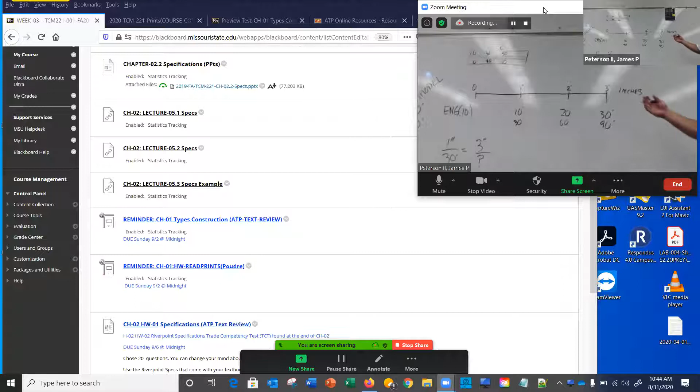Now that's physically, graphically, spatially. I've had many people that just sort of get the ratio right away because that's all it is, right? 1 inch to 30 feet is the same as a 3 inch line we measured to question mark. So here's cross multiplication: cross multiply to solve for that. We got question mark equals 3 inches times 30, so that's 90 divided by 1, which is 90. So there's 2 ways to do it, or you can use one to check the other.

I know somebody's got a question, because if not, it's the first time I've ever done an awesome job. I don't feel like that was awesome. Might be okay. It's all right. We're gonna do, you'll have the homework where we're laying out a box. I'll bring it up here in a minute. Let's see. Yep, that works.

Now, the architect scale, actually for me, is a bit of a struggle because I never use it, maybe twice a year. Which is why I didn't bring my architect scale, and I will probably mess it up the first time.

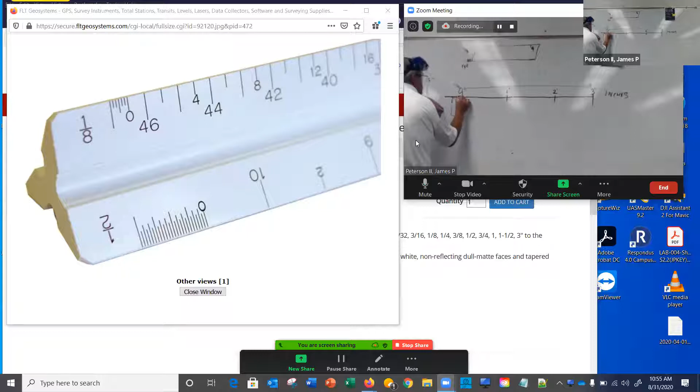You might have to guesstimate if it's between that and the 1. So if that line really continues to right there, it's 3 inches, since there's 8/8 in an inch, right?

So let's go get that first one. If we have 1/8 of an inch equals a foot, and we went a foot on paper -- let me say it again because I boo-booed. You got the 1/8 of an inch scale, so we go 1 inch on the paper. How many of those 1/8 are in there? 8. So that's 8 feet, right?

16 feet, 32 feet. Now, here's another reason I'm not a fan of the architect scales. I just told you that 1 inch is 8. Why is there a 42 next to it?

Because when you measure the other direction, it works for that scale. Whew. Nobody wants to laugh with me?

Now, that's the straight 3-inch portion. And I said that it's going to go 2, 4, 6 inches, or 0.5, but that totally would be to here. That was just to represent it. We got 32 feet, 6 inches, or you'll see later that's 32.5 feet. That's a dash between the feet and inches.

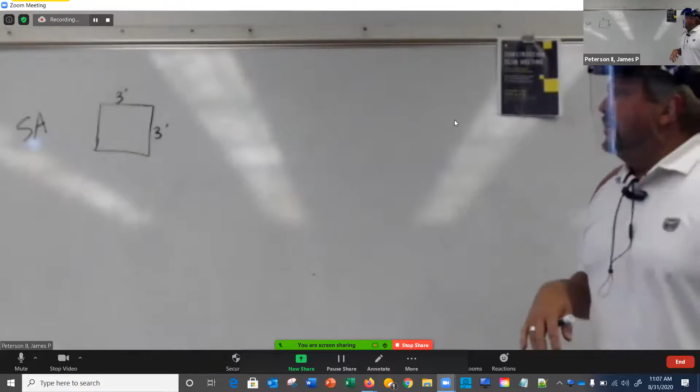We abbreviate surface area with the 2 letters in it most of the time. And if we got a little box, and that's not as square as I would like it, that's not bad. Okay, so surface area, we're just dealing with a plane view here, planar view, plan view.

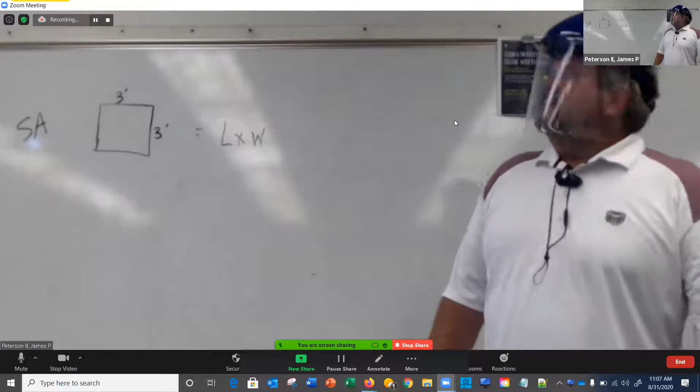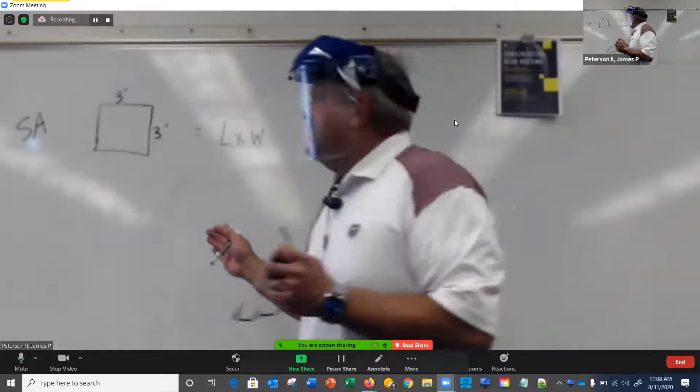And we know that it's going to be length times width, right? It doesn't always really matter which one's which. I've had some people say, which one's length, which one's width? I don't know, which way do you want to flip it? Now, in this case, it's a box, so it's just 3 times 3, 9, and that's square feet, right? Because units matter in this world. That's kind of a magic number. Actually, I picked 3 feet because what other distance is 3 feet long that you measure with, or your parents may have used? No, can't go there, they don't do that anymore. Anybody know what 3 feet equals in this world? Yeah, the yard, thank you.

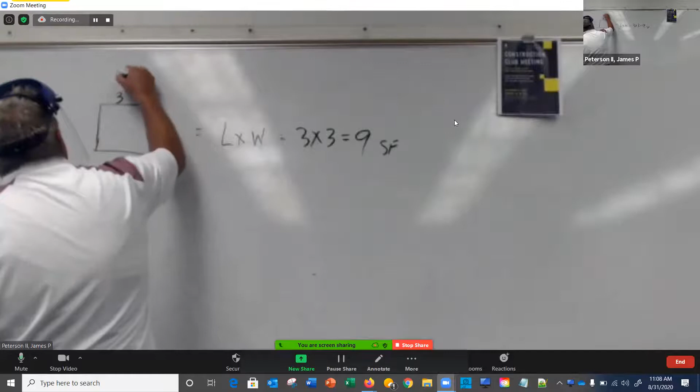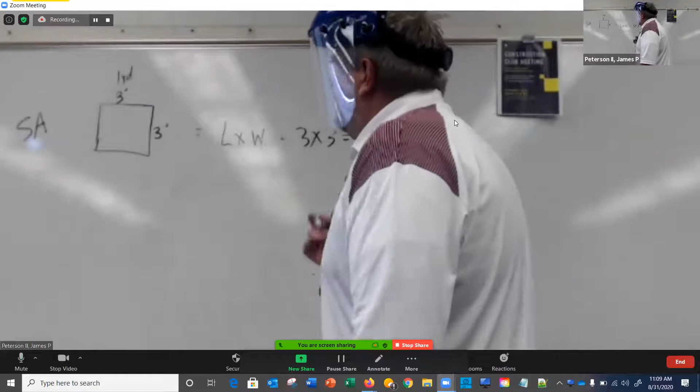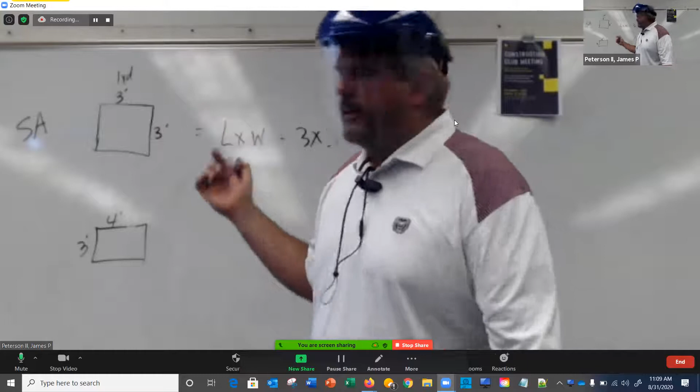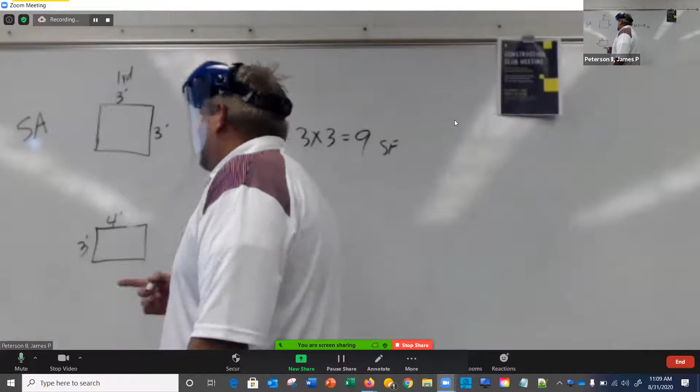I've heard 2.7, 3.2, all kinds of crazy numbers. 3.2 is getting there because that's meters. All right, so that is also 1 yard. Now, we're not going to get into metric in this class, so we can avoid that. Now, if we took that same thing, and now it's not square, no big deal, right? I don't care which one is length times width, unless we're putting this in the ground on a set of plans, it's going to tell you which way is up. Matter of fact, when I draw this in 3D here in a minute, neither one of those is... well, I'll let you make your own conclusions here in a minute.

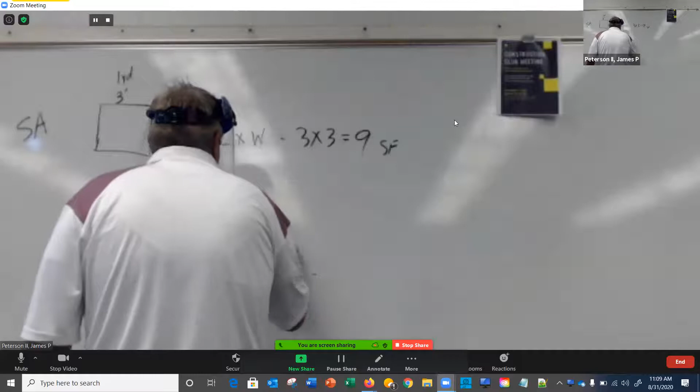So that's 12 square feet. All right, hopefully no questions there. Now let's try to go a little further.

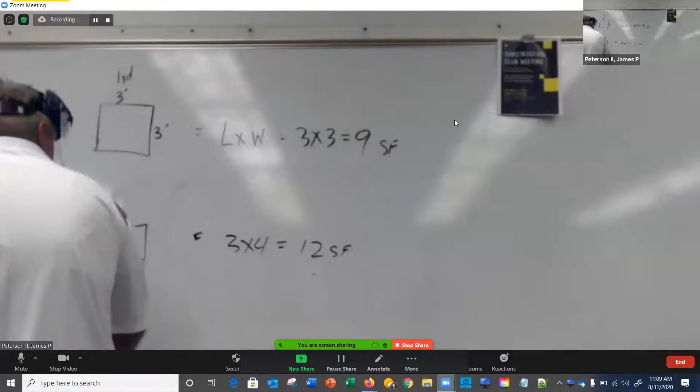Let's deal with the volume, right? Let's see how good I am today on my 3D boxes. They get a little wonky, not too bad. Forgive that it's not exactly proportional. That is a square box.

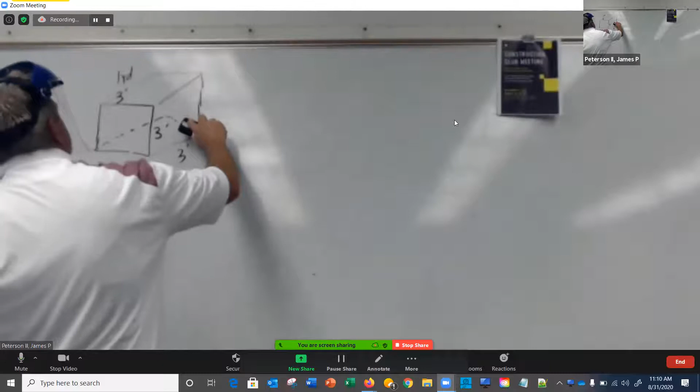So we want the volume of that. Now, if I was really good... nope, that's boo-booed, isn't it? That's not right. Yeah, it's close, a little wacky. I better skip that. I'm not too good at that hidden line. I know that would be it. I did have it right, didn't I? Yeah, I'm going to leave it though.

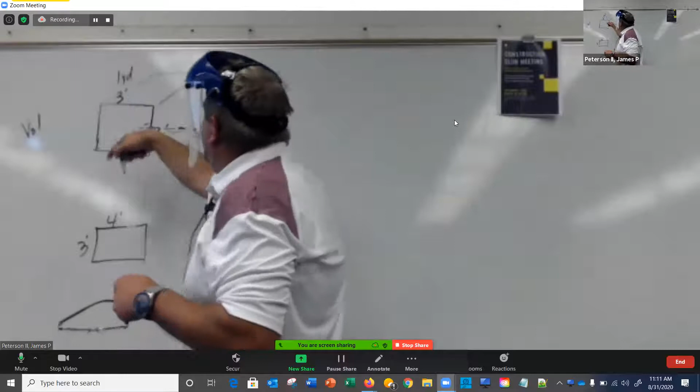You know, there's the back side here, which is going to parallel that. And then that's going to parallel that. Yeah, it's not bad, those should be dashed through there. So that's behind there, right? And this is always the tricky part. Makes it a little complicated, but that's the back side of it. I'm going to erase that again because I really don't want you to have to think too much about that.

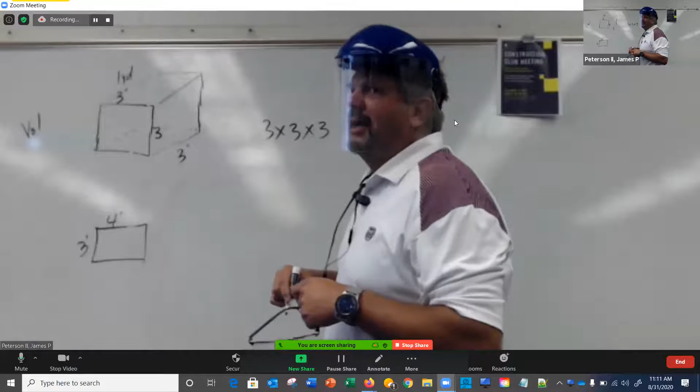Because we got 3 times 3 times 3, 9 times 3. What do we got? 27, thanks man. Now, is that 27 feet? No, that's cubic feet.

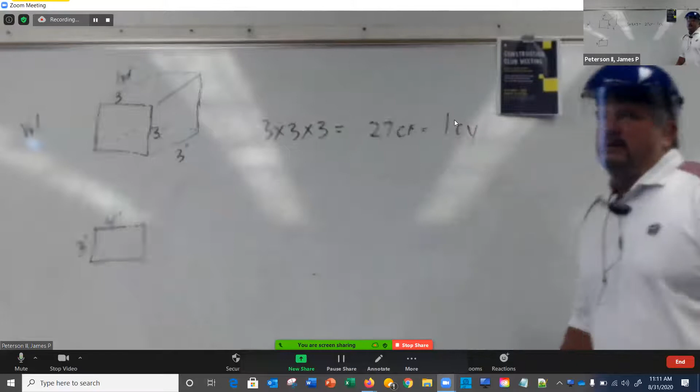Now, why is that important? Because that is also how many is in a cubic yard. This is magic, you will need this. We convert cubic feet to cubic yards very often because really feet is kind of a small number when we're talking about construction.

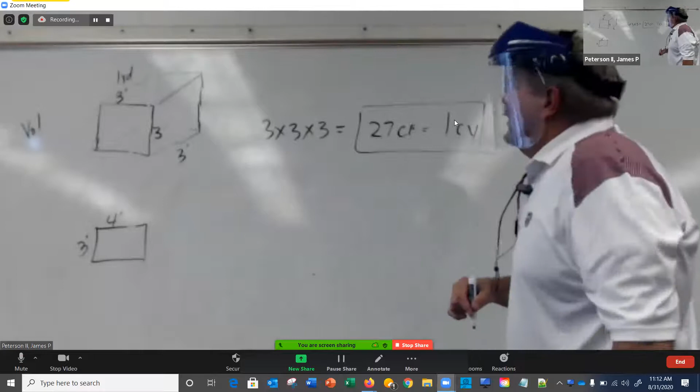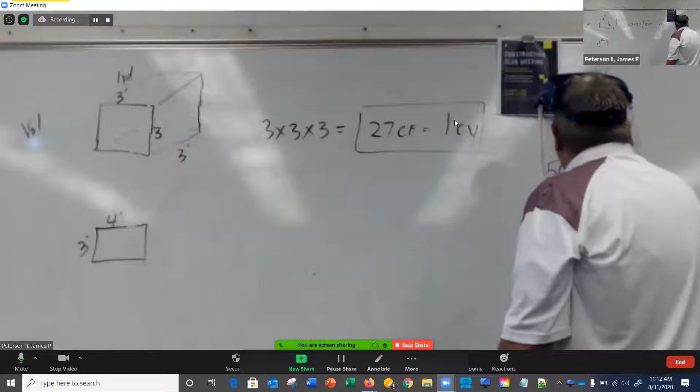So if I told you that we had 50 cubic feet, and I wanted that in yards, you would go: 1 cubic yard is 27 cubic feet. So 50 divided by 27 is a little less than 2, or a little more than 2 something, right? What do we got? A little less. It should be 54, so 1 point what? I just made those numbers up. 50 divided by 27.

You've got the calculator that you're supposed to bring. 1.85 sounds good, I was thinking close to 1.9. Because I found out that really one of the hard things is, you know, maybe you don't use your calculator all that often, so it's good to practice that with the calculator. So we're going to convert those things to cubic yards.

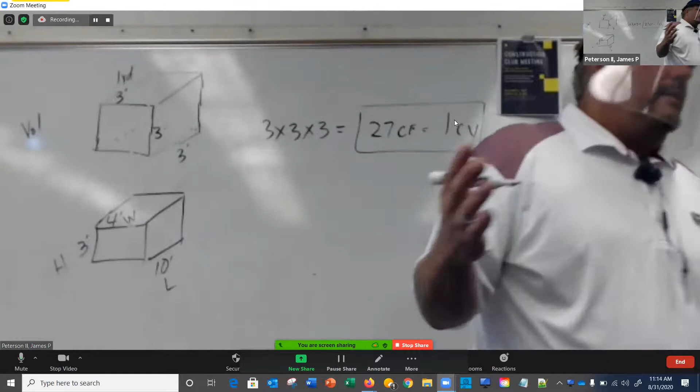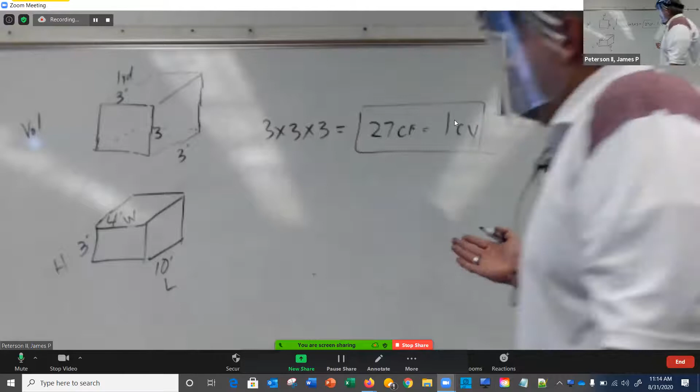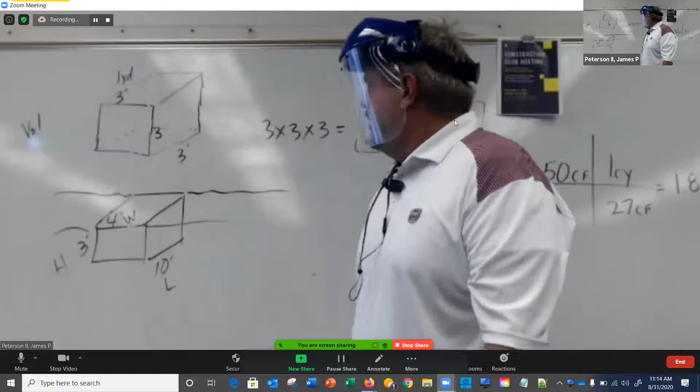And then it's the same deal, right? For something that's, say, 3 by 4, and let's just say it's, I don't know, 10 feet. You can call that the length, you can call that the width, we actually tend to call that the height. Now, I don't get too hung up on memorizing what that is, because I just physically look at it, and if this is going in the ground, then I know that's going 3 feet down into the ground, right? And we'll get tricky later on where we kind of over dig to put a footing in or something, but this one's just going to be 3 times 4 times 10.

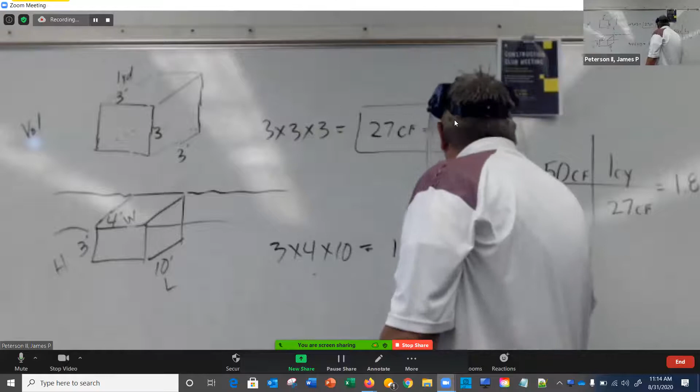So what do we got? 12 times 10, 120 cubic feet. Sound good? 12, yep. And then we'd do the same thing over here, 120 cubic feet. 1 cubic yard is 27 cubic feet.

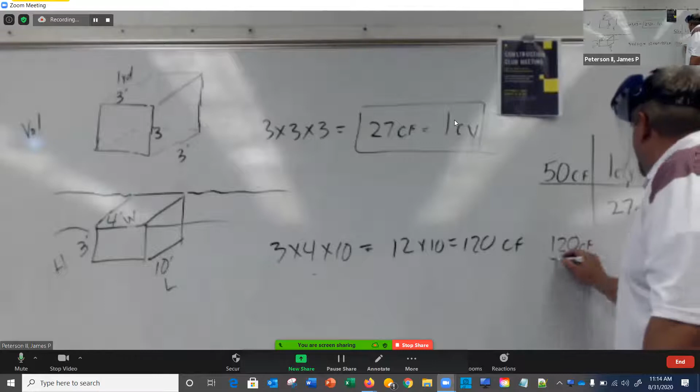So we're definitely going to have 4 something, 4 point something. 4 - man, that's great, that's my favorite number. 4.44 anyway.

Yeah, so you know, we did scales, a little math, right? Kind of a rough day. Don't sweat it too much, it doesn't get any worse than that. I mean, yes, we're going to calculate.

Those of you out there in the virtual world, I'm going to point towards the floor here because we have these carpet tiles. And these carpet tiles look like they're 2 foot by 2 foot. So if you calculate the whole square footage of this room, how many tiles would you need if they're all 2 foot by 2 foot?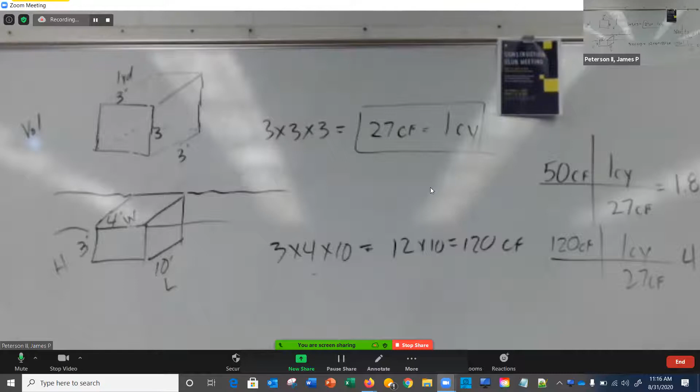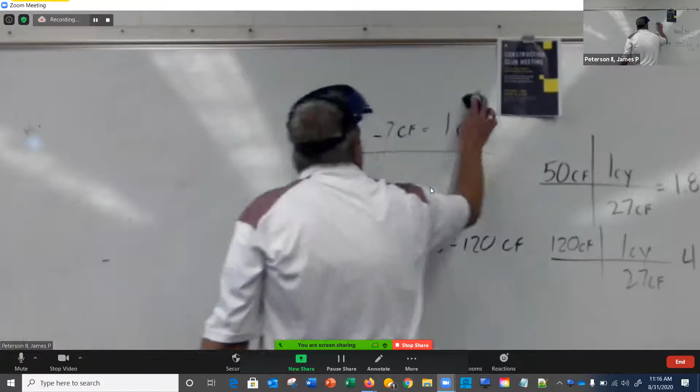So if we had a room 20 feet by 20 feet, we got 400 square feet, sound right?

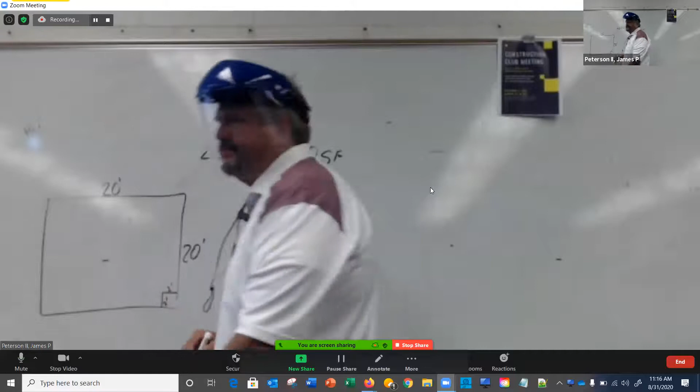But I just told you that if we're looking at this room from a plan view, that's 20 feet by 20 feet. But one little tile is 2 feet by 2 feet. So one tile, 2 by 2, is 4 square feet.

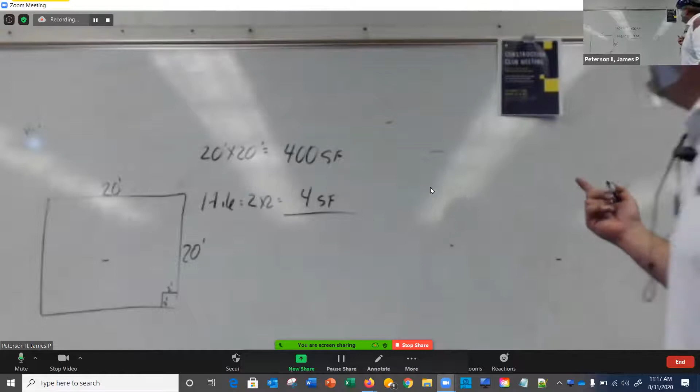How many tiles do I need? 100? Because we took 400 divided by 4, right? And we got 100 tiles.

Now, just to introduce you to something we're probably going to talk about more next week, but would you order exactly 100 tiles for this room? I mean, for one, you don't want to get shorted, which happens. But two, most rooms don't fit this nicely, because I just made those up to fit nice. You're probably going to come up with something like, a lot of times,

100.8 tiles. Are you going to order 101?

What if I told you if they come in packages of 100 minimum? You want to order 101 of them, but guess what? Unless you got a really good buddy at the tile store for commercial tile, you're buying 2 boxes of 100 each.

So you hope they got another room, right? Which this is just one little room. They probably all get the same tile. But we will do a lab like this later. But this is the math. Nothing else.

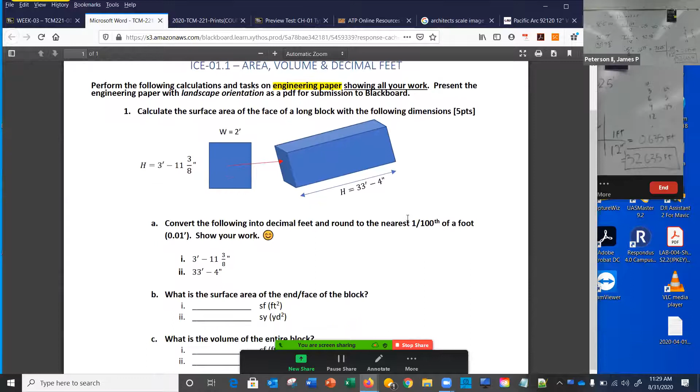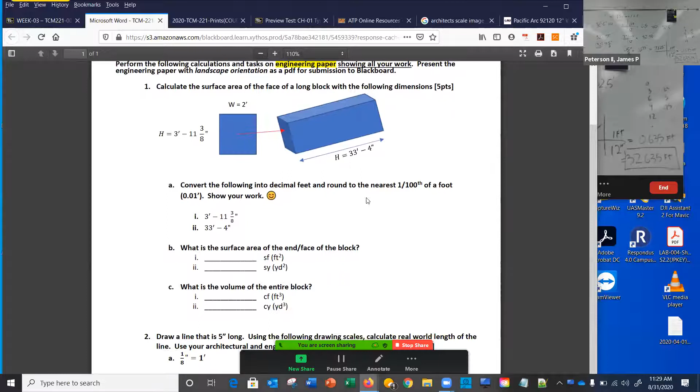So you guys stare at that for a second - was it open? Make sure it's open. Yep, so you can pull it up yourself, see what we got here. It's just doing the same things I just did up there, right? So take a peek at that.

I'm gonna take a little break if you guys want to, and then somebody remember. All right, so I'm back to recording. Sometimes I know I better, ooh, that's good, okay. Should be still connected. Sometimes when I walk away, it wants to lose it. Okay, we're good.

Okay, so what I've pulled up is chapter 2, what I'm calling point 1. So when I have a point 1 and a point 2, I've usually broken this up into a couple different types of lectures. Again, you'll notice we've got videos down here that exist already, so kind of doubling up on things. I'll put the sessions up that we're doing, and then you'll have Professor Nelson's to look at as well.

So anyway, I brought up this one here. Let's go ahead and take a look. So this is obviously straight from the book. What I want to do - probably not. I'm not going to go into presentation mode so that I can keep the screen over here for the virtual world. Okay, so...

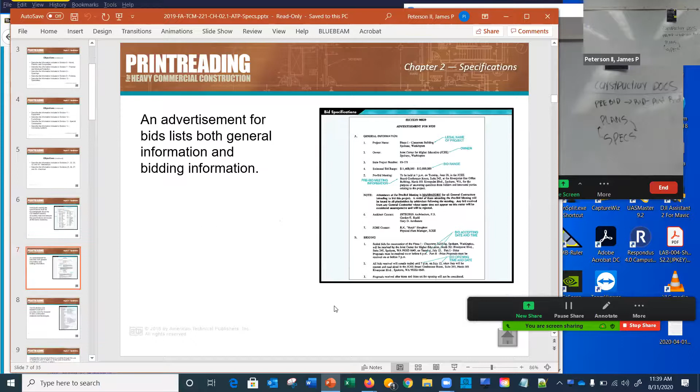Lots of objectives. Here's all the areas and the divisions, we call them divisions. 14, we're still going. 28. We're going to show you that there are 50 divisions, and then there's a whole bunch of numbers after that. It sort of has some flexibility once you leave the first couple sub numbers.

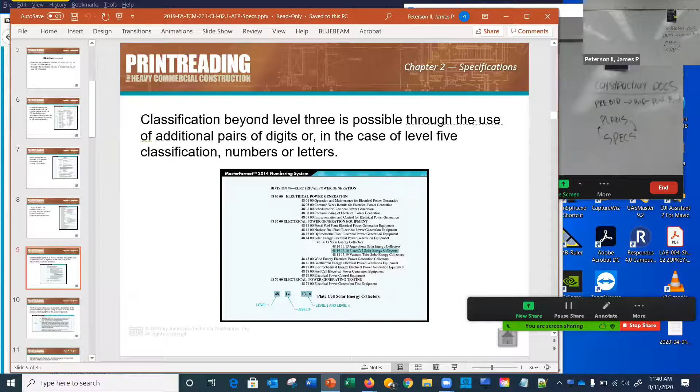Now I'm going to blow this up, so I'll go over there, might as well. Okay, a little hard to see back there, but you can look at the PowerPoints later. We're looking at, I believe, 48. So we call this first one a level. We're in division 48, which is level 1. Then level 2 is just another subheading underneath the big one, and then you can have 13.16, whatever, levels 3 and 4. That can go on and on if necessary, just like you're writing a real fancy technical paper. But those are the basic ones.

When you look at that, you may see that on a drawing. Remember, we had some that had these specifications listed as notes on the side that would tell you to go look at this division and potentially any one of these little pieces in here. For instance, 48, 14, 13.16, plate cell solar energy collectors. So if you were the solar or electrical contractor, you're going to live in this one.

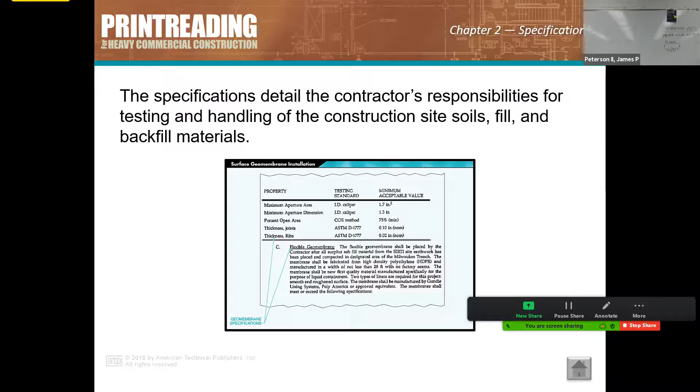I'm going to hit the high points today, not get down in the weeds. When we deal with site work, you're going to see there's a lot of specifications. There are specifications hitting them all, but there are some pre-bid documents or other things in the specifications that wouldn't be called specs. We'll talk about soil information.

So if you're in Division 4, you're doing masonry construction, all things masonry. That doesn't mean another little piece of it wouldn't reference another division. So not only are we sitting in plans and specs, but you might go from one division to another division and maybe back again.

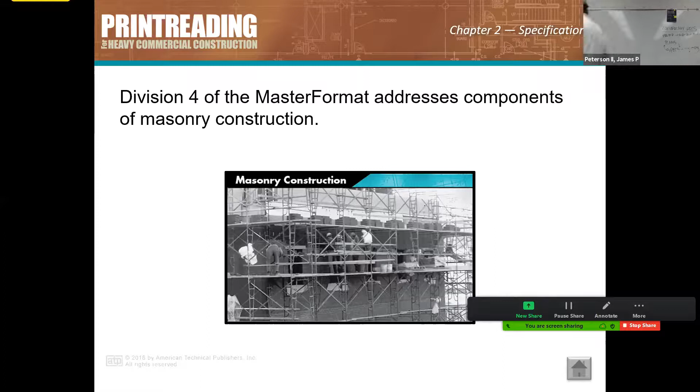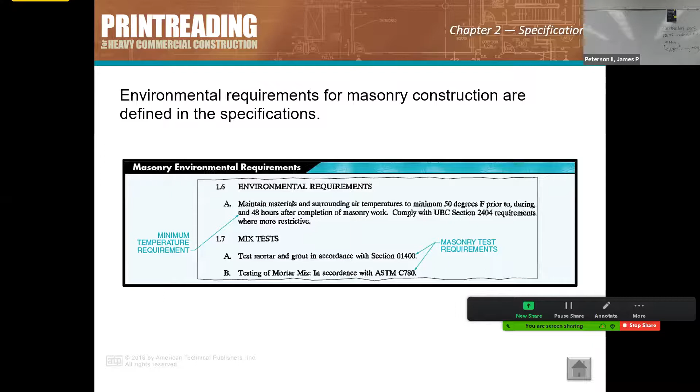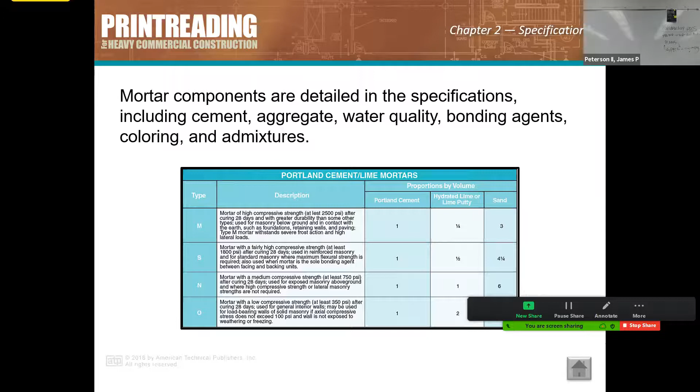I'm again not going to hit all of it, but a little highlight here is if you're talking about mortar, you need to know about what kind of mix it is, what its compression strength is. That may be on the plans, and it may be in the specs, it may be in both. That's what this slide's showing you.

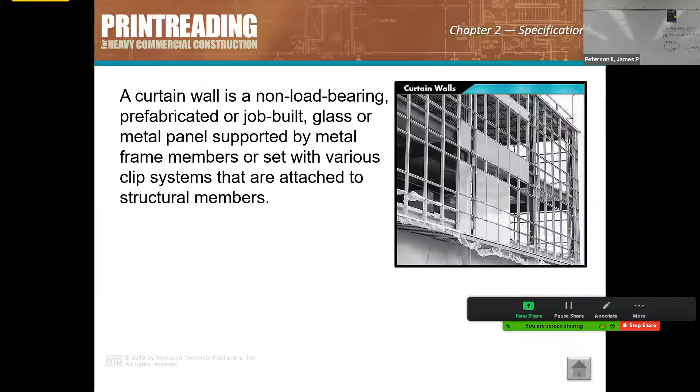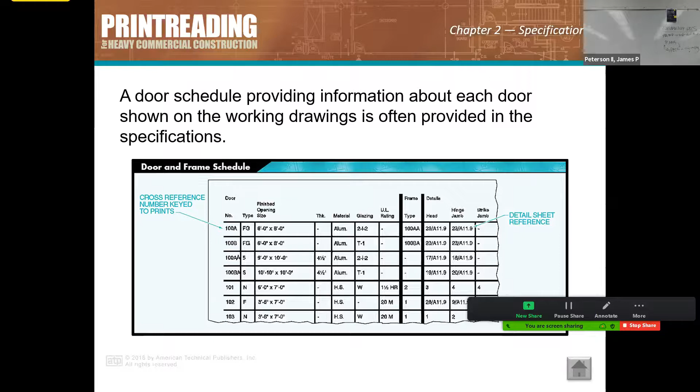Division 6, woodworking. Division 7 got its own thermal and moisture, so like waterproofing, curtain walls. Okay, so door schedule - remember I mentioned door schedules as a drawing component? This is it in a specification, which is possibly a whole nother set of sheets, or this could be placed on a drawing, so they can show up anywhere.

Yeah, so those of you involved in interior design and construction both are going to have to deal with finishes. And this is most likely going to show up in a specification because it could come through lots of other divisions.

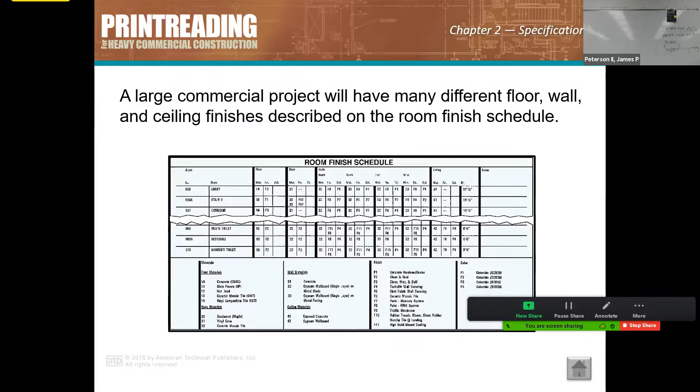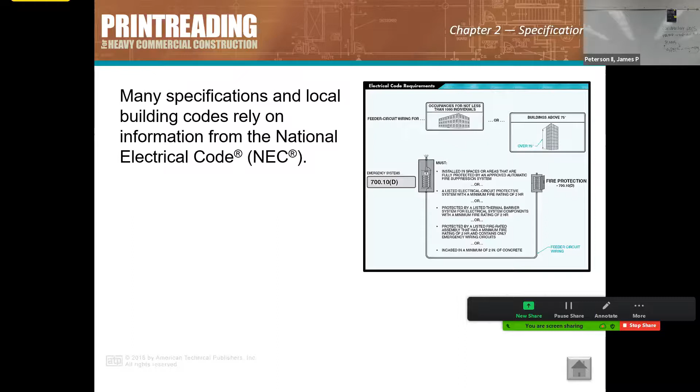Okay, so a highlight here is that there may be codes out there that this has to comply with, so they may do what we would say is reference them. So the specs, and really the plans both, codes are either going to be totally included or just referenced. Most of the time, it's referenced unless it needs some clarification.

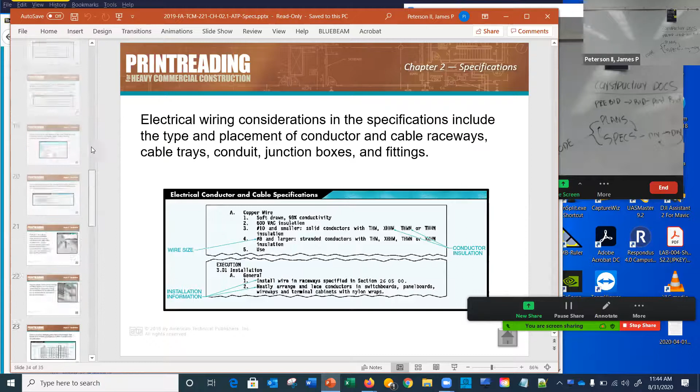Most of the highlights, but I want to show you what we're getting into. Yeah, we'll show you that one. Those are hard to see. Let's see if I can blow that up because that's not pretty. Yeah, that might work better.

I'm going to point up here so folks out there can see it. Remember I said there's pre-bid, bid, post-bid documents? Any of that that needs to travel into the specifications is going to be in the front end. That's procurement and contracting requirements. It's going to tell you all the things you need to know about, like bonding capacities, all the requirements, how you can get paid, all that good stuff. And that's division 00.

So this is going to throw you for a loop a little, right? Because I said there's 50 divisions. What's the last number? 49. There's a 0. You're going to get tripped up because we put 49 and 50 as one of the questions.

Big things to think about: we really like to put these in group categories, and there's only 2 big groups: procurement and specification. But then there's subgroups, right, and those are broken out by construction system. And then we have the divisions. You'll have this to look at, because we're going to make it available during the test. We're going to ask you how many subgroups there are, how many divisions there are, how many groups or group categories. They all call them categories, but you've got groups and subgroups, right? I'm going to highlight that for our thinking into next week.